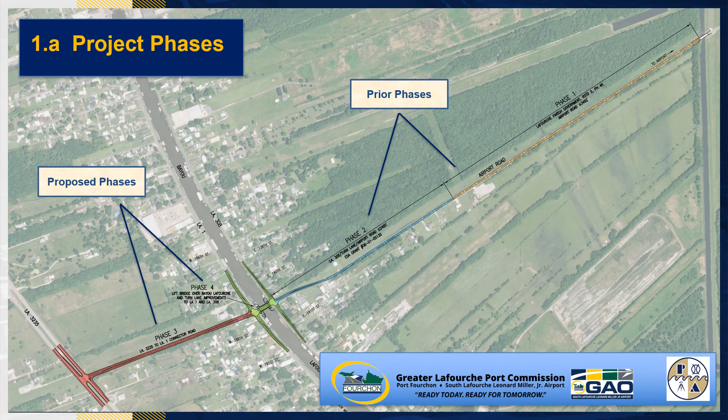Part 2, Project Goals and Objectives. This project includes 4 major goals. The goals or objectives include: A, provide direct, safe connectivity to Port Fourchon and the statewide highway network. B, enhance local connectivity to Louisiana 3235. C, improve the resilience of the transportation infrastructure, industrial operations, and communities in Lafourche Parish and the Gulf of Mexico. And D, improve the economic competitiveness of the South Lafourche area.

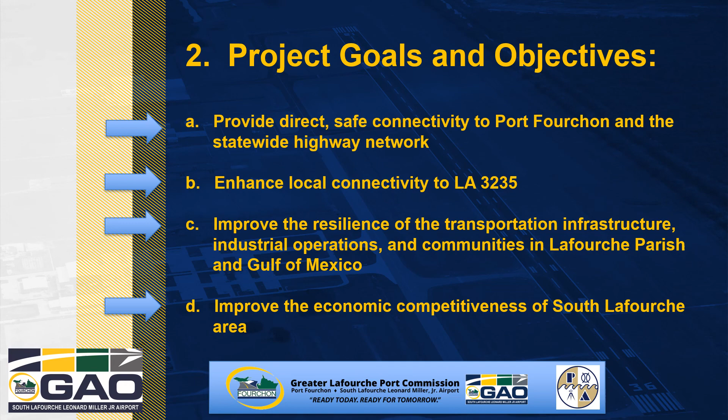Part 3, Major Design Elements. 4 major design elements make up the proposed project. The elements include: A, new 3-lane vertical lift span bridge. B, 0.4-mile 2-lane connector roadway. C, roadway and drainage improvements along Louisiana 308, LA 1, LA 3235, and the proposed connector roadway. And D, utility relocations for water, gas, and communications.

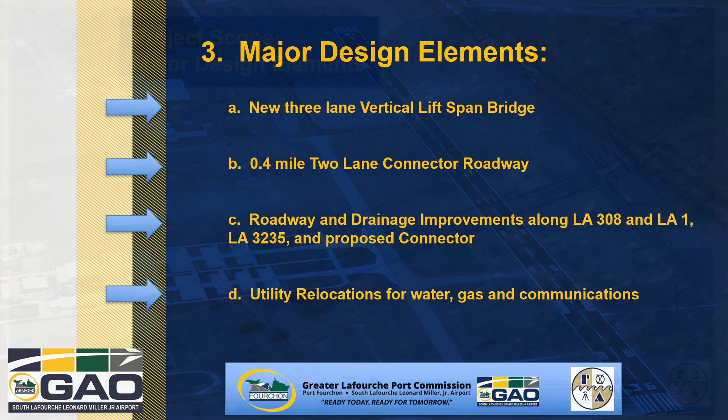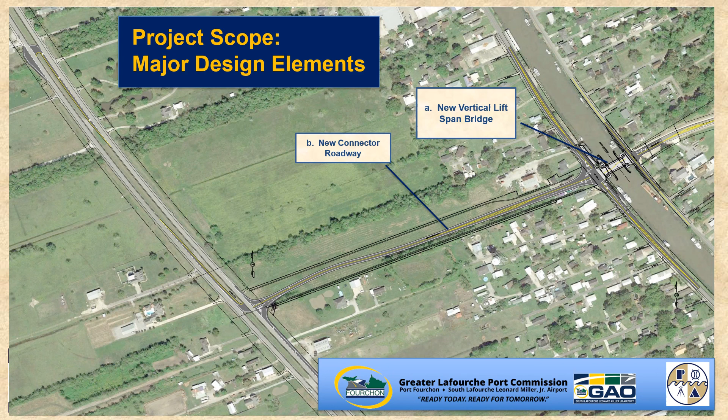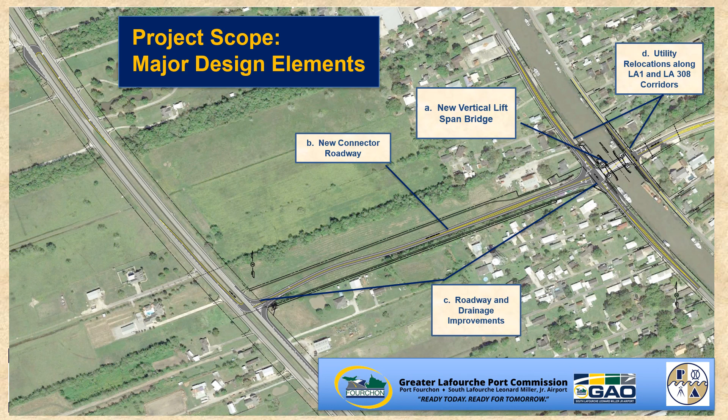Project scope, major design elements. Here we can see the location of the major elements on a vicinity map. A, vertical lift span bridge. B, new roadway connector. C, road and drainage improvements throughout. And D, the utility relocations along Louisiana 1 and LA 308 corridors.

Zooming in on the location of the proposed bridge, we can see that it is a 3-lane lift-span concrete structure across Bayou Lafourche. The existing roadways adjacent to the bridge will be realigned and overlaid. This proposed bridge will be similar to the LA 1 to LA 308 bridge in Mathews.

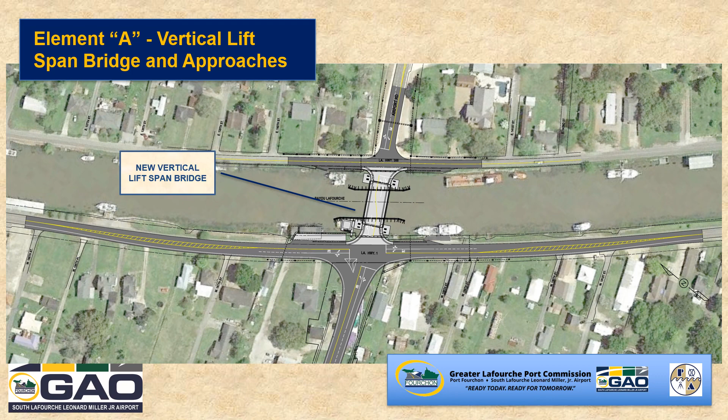The second major element is the connector roadway. This roadway is approximately 4/10 of a mile long and will provide direct access from Louisiana 3235 to the South Lafourche Leonard Miller Airport. The proposed asphalt roadway will also include incidental drainage improvements along the new corridor.

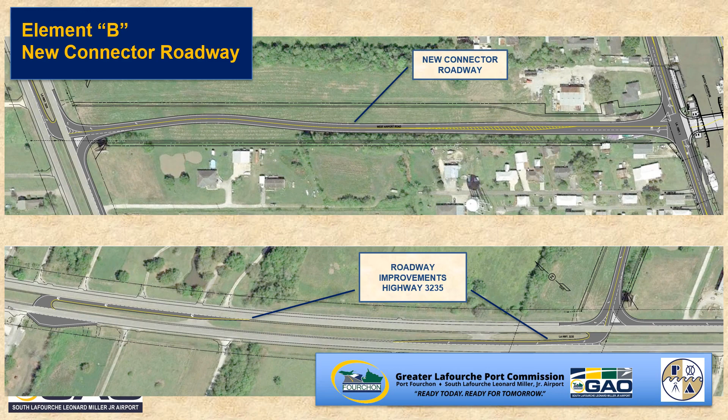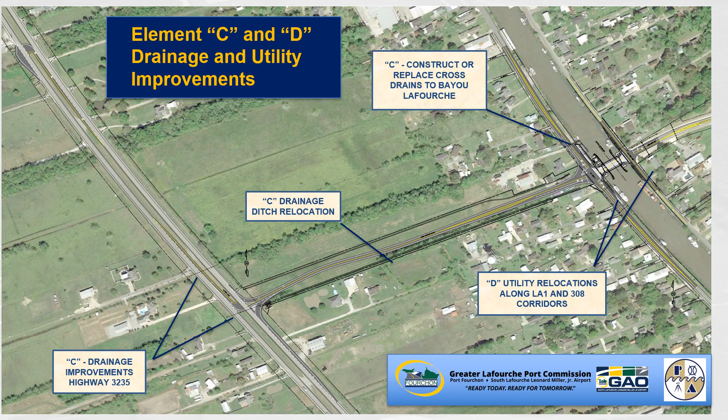Elements C and D, drainage and utility improvements, can be seen on this vicinity map. Element C includes drainage improvements along the new corridor, LA 308, LA 1, and across the 3235 highway. Element D will include required utility relocations near the proposed bridge, due to slight widening of the roadways.

Part 4, Project Impacts. The next section describes the anticipated impacts of the proposed project, including construction impacts to landowners.

Roadway improvements, Highway 3235. The connector roadway will be directly accessible from LA 3235. Entrance and exit accesses are being developed at this time for approval by the Department of Transportation and the Federal Highway Administration, designed to provide safe access to and from the proposed connector. Landowners along the west right-of-way should experience minimal impacts, as improvements should not require additional right-of-way acquisition. Landowners along the east right-of-way may experience minimal widening of the highway right-of-way, especially near the connector.

Roadway improvements, LA 1 and LA 308. During construction, landowners along LA 1 and LA 308 will experience some traffic impacts, minor noise impacts, and will be in proximity of the bridge construction work. Temporary traffic detours, reduced speed limits, and other delays in traffic flow should be expected.

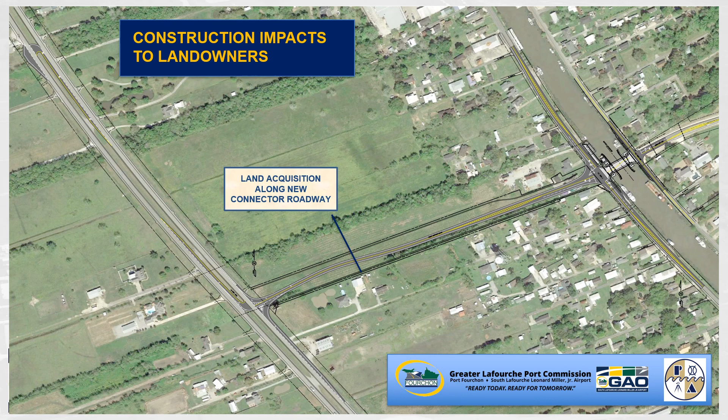Land acquisition along the new connector roadway. The largest impact to landowners will occur at the location of the proposed connector roadway. The Port Commission is currently finalizing the acquisition of this property. During construction, there may be minor noise impacts. Drainage in this area and adjacent properties will be improved upon completion of the project.

Drainage ditch relocation. The existing ditch immediately to the south of the connector roadway will be regraded to facilitate positive drainage in this area. The details of this element are currently being designed. Construction impact should be minor.

Construct or replace cross drains to Bayou Lafourche. We anticipate several cross drains under LA 1, LA 308, and LA 3235 will be replaced in the project. Temporary traffic impact should be expected. These changes will facilitate improved drainage into Bayou Lafourche and the outfall canals west of 3235.